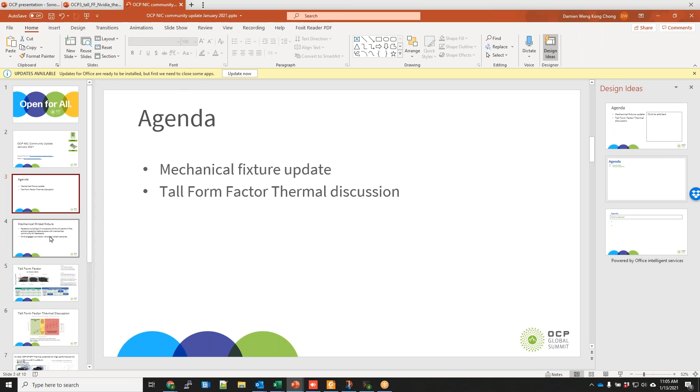First of all, the mechanical fit test fixture update on behalf of Chris. Facebook completed the design before Christmas, and we decided to build this small prototype in-house. We have a small CNC lab in-house, so we're going to build it there. After the CNC is done, Chris intends to perform the fit check himself first, before he shares it with the mechanical community for feedback. So far, Chris has also engaged the connector vendor to obtain the connectors to fit into the test fixture.

Is there a timeline by which the community needs the design files to be contributed? The reason I ask is because the intent is we prototype it and then send it to a few key folks in the mechanical community for feedback, to see whether it's good enough before we actually post the design file to the Wiki, to make sure that we have a higher quality contribution. Does that sound good to the folks here?

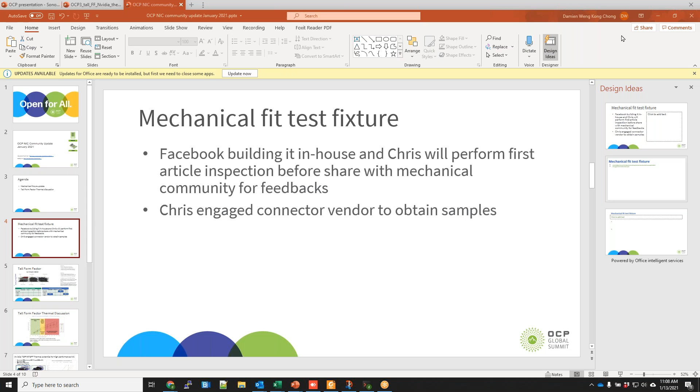So in terms of CTF, Jonathan, is it to validate all the CTFs listed in the spec? And also, are you checking just the main dimensions, or does it also check the tolerances? I don't think this will be able to check all the tolerances down to the significant digit that we're looking for, but it helps overall. Okay, thank you.

So Damien, is it possible? I know you're saying you're going to send it out to a few companies to try. Is it possible to sign up for this kind of fixture, or request one? Yeah, it is possible to sign up to get early samples.

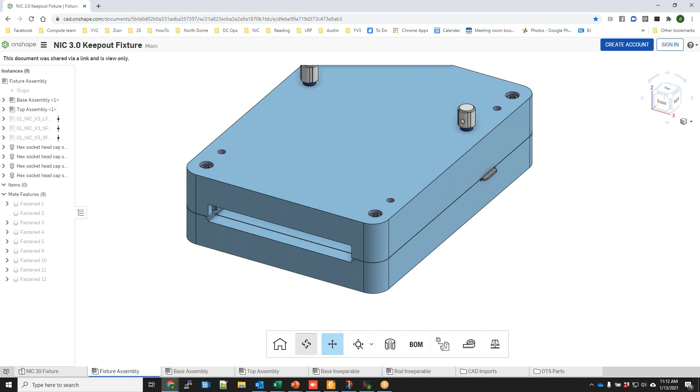So it is a fit fixture that basically we can plug the small form factor or large form factor cards into and see whether it fits. The top portion, as I understand, is see-through. Yeah, so we can see whether they have any interference. Yeah, this side is for the large form factor.

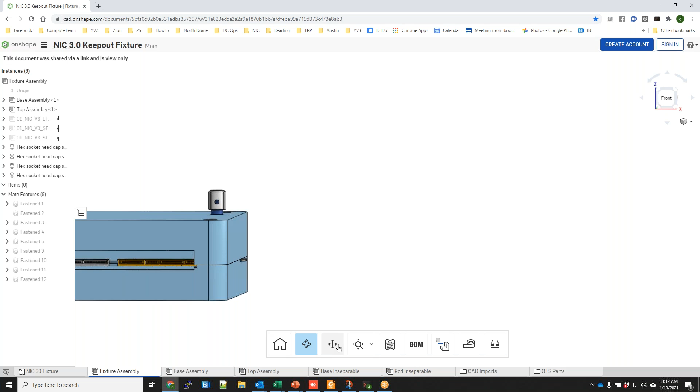So you need the connectors from the back? The connector at the back will be, as I know, fit in and glued. OCP, right? Yeah, so you need the NIC card to plug into the fixtures. So the unit under test is actually the NIC card.

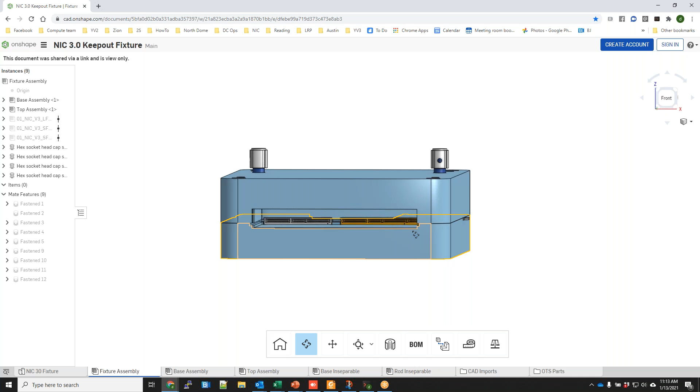Because the action item says Chris is looking for some connectors. If he's looking for the connectors of that NIC card connector, let him contact me. I'm Junhua Chen. Oh, Jinha. Yeah, sorry, I mean Chris already got it. Okay. Thanks, Jinha.

Yeah, this also works well. Let's say you do an NPI on a new NIC card, and when you assemble everything you don't have the high-end measurement, you have a caliper that you may not trust, you can take your new card and plug it into this fixture to make sure that everything fits and is within the limit before plugging into a system or sending it out to a customer. Okay, good point.

Hey, Jonathan, so is the goal of this in addition to the actual measurement at manufacturing, right? It's not to say that we're going to skip those measurements later. This is mainly for engineering purposes, right? It's not meant for production, where you say, "Hey, my card fits into this, so that means I pass all the tests," right? It's just for engineering purposes.

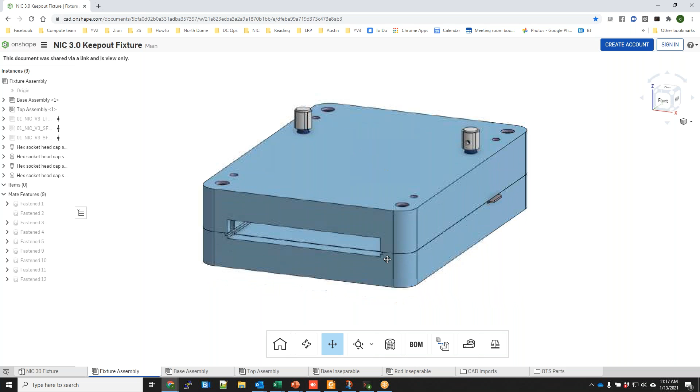I'm not sure. I think Chris made the top side see-through, maybe plexiglass. And then it's a slide-in. So if during the sliding process you're hitting something and it's hard to slide in, you know it, because the intent is not clamping, it's sliding. It mimics exactly the way you insert into a system.

Right, but that would be a gross violation. I'm just talking about something that is already on the borderline or barely touching. If the surface allows us to spray some paint or something on the top lid, then you can visualize it: if the dye shows up on the heatsink, then you know it's actually on the borderline. So it gives us a better idea of the margin that we have.

Yeah, I'm not sure. We may need to verify that, but I'm guessing with the way the fixture is, everything will be that opening. Once you insert it inside, if it fits through that opening, that means it's going to fit through that profile inside.

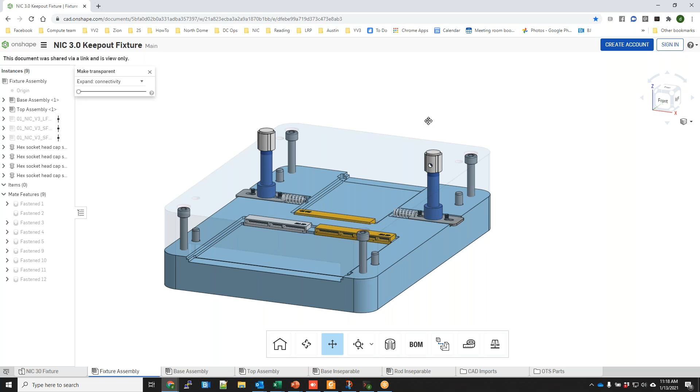Okay. I'm not sure whether your dye has some special characteristic, but I think it's possible to spray something on this, and then you can fit it in and see whether it gets scratched. The dye capability was not mentioned when we first discussed it, but I don't see a reason why we cannot spray something on the material. Okay, we'll figure it out. Thanks, Damien. The only thing we talked about is the top has to be transparent, so we can see any potential interference and how well it fits.

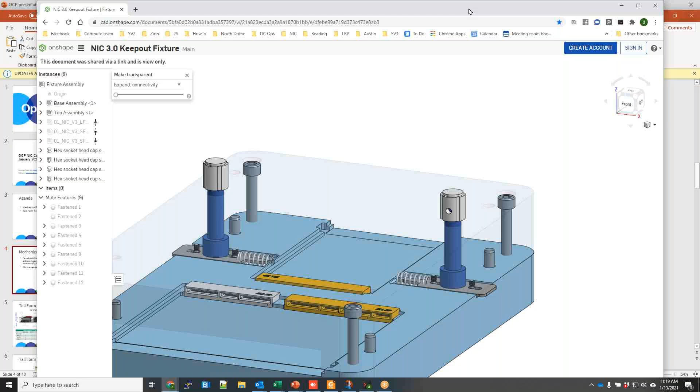Oh, by the way, since we are on this picture, this is the added feature in the newest design that has the spring loader to check the internal locking mechanism. It was feedback from the community, and Chris incorporated it. So just push in, right? Push it in, or pull out. Actually, I'm not sure how it works. It looks like it can be pushed in and out, and there's this thing to screw it.

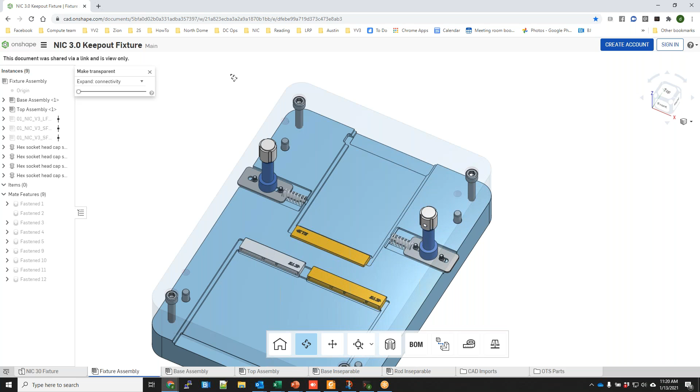Yeah, it looks like push in, because that's how the spring was attached. So I guess it's push in. I have not seen the real one. I think it's in the process of shipment. Okay.

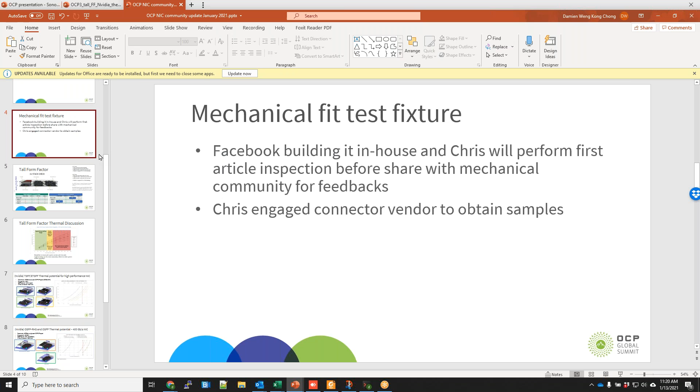Next, we'd like to continue our discussion on the tall form factor. What has not changed is how we stack the two tall form factors in the 1OU. However, it's also good to show the NIC in the open rack standard, 1OU, versus the standard 1RU. 1RU is approximately 44.5 millimeters, and 1OU is 48 millimeters.

With the slightly more height, we're actually able to put PCIe CEM together with the 17.8 millimeter connector that we call tall form factor. We also can stack if there's any need, but I don't think there's any need to have the 17.8 and 20.1 in the same chassis.

But what I really want to point out is if there is a need to have 17.8 stacking with CEM, maybe in an open standard like OpenRack v3, it would be a good one in the future. Just to bring up some mechanical awareness here.

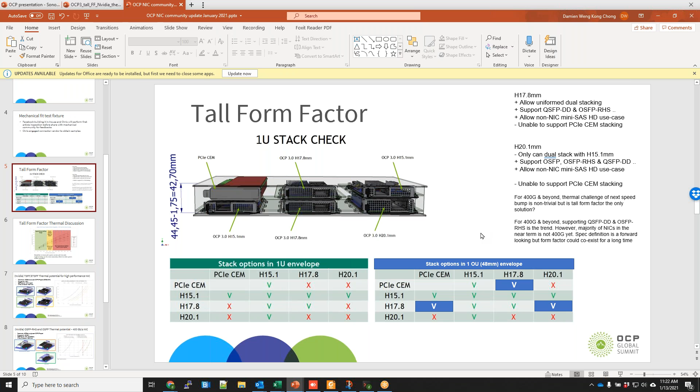The next one is the tall form factor thermal discussion around hot aisle. I sent out email to some system vendors asking for clarification on the hot aisle operating condition. I'm not that familiar with hot aisle, because in Facebook designs we actually have cold aisle.

The reason I asked is I have seen this chart, Thomas, we have it in our OCP NIC spec, that kind of says that beyond 300 LFM, even for hot aisle, is non-typical server airflow. I would like to double check this statement.

Yeah, and do we have a system vendor online that also has a system where your NIC is plugged into the hot aisle? Would like to double check whether we actually have the boundary condition correct here. Any feedback on the hot aisle airflow capability for your systems?

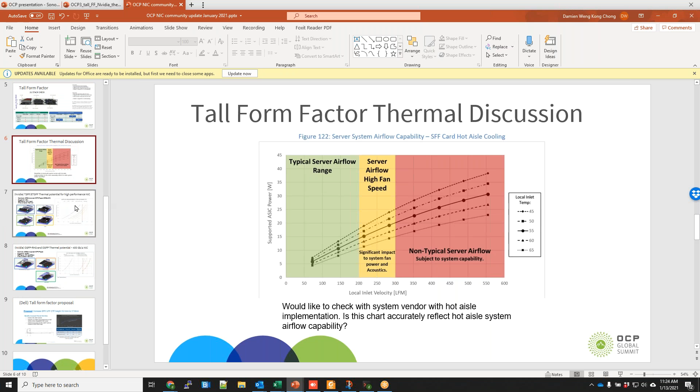Okay, now I pass it to Michal and Anna from NVIDIA to talk about their findings regarding the tall form factor and the extra tall form factor, and also Lenovo Warren requested to check 85-degree optics. That's something that the NVIDIA team has done as well. Michal and Anna, do you want to share, or we can use this screen? And Damien, we can continue with this screen. It's okay, I think. Okay, great.

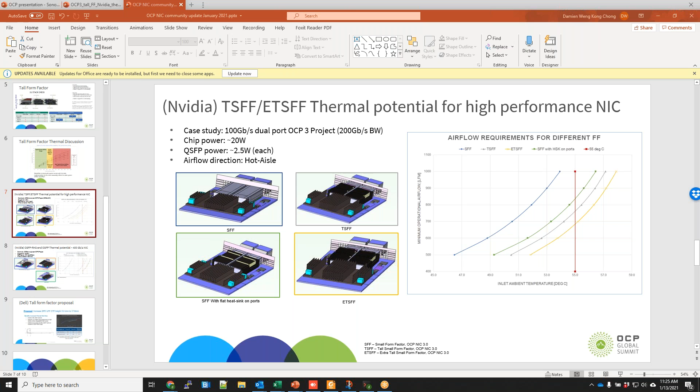Okay, do you hear me well? Yes. Okay. In general, this slide remains the same as it was a month ago, except the axis title with inlet ambient temperature that we changed. The main purpose of this slide is to show that for current or previous projects, there will be benefits for a higher form factor. For higher form factor we have better results, and you can see here that for extra tall form factor we have the best results, and for tall form factor better than our current form factor.

This case study is about an OCP3 project with 100 gigabit dual port. Chip power is about 20 watts, and QSFP power is 2.5 watts each. It's Mellanox NVIDIA cables, but in general it can be up to 3.5 watts. We also checked the hot aisle direction, and we can see that for the small form factor, it's really difficult to pass 55 degrees Celsius ambient temperature. If you can insert some fins on the QSFP, we can decrease our airflow requirements or increase the ambient temperature that we can pass.

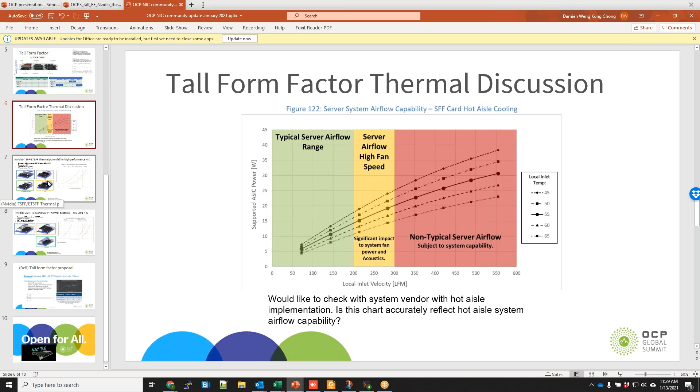Yeah, you mean this is 45 to 65, right? Yeah, this one. This is a chart, some kind of graph, but we also have a table with all tiers. For 55 degrees, the highest tier is tier 12, I think, and it's 1,000 LFM. So we don't have more than 1,000 LFM in the spec. Yeah, but that sounds like a lot. That's why I also double check with the system vendors. Yes.

Hey, I have a question. You said this data you're showing addresses the QSFP thermal. Yes. Now, is there a study for what it looks like for different chip powers? Right now you're fixing it at 20 watts. Do you have one that shows the airflow required for chip power going beyond 20 watts?

I didn't do it for this specific project because the most difficult part for us is cables in general. I just took a project that we did in NVIDIA and made some changes in the design of heatsinks. It is possible to check how it fares with a higher ASIC power, but again, the main problem here is cables, the optical modules.

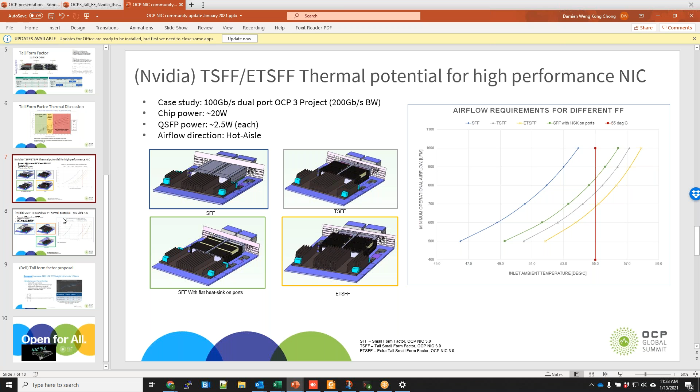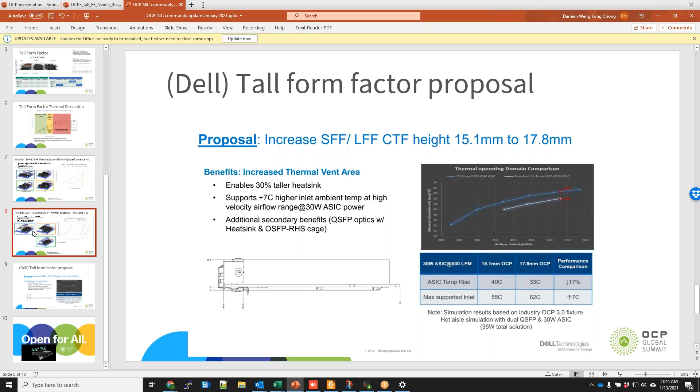Because in NVIDIA analysis, you see that OSFP RHS cannot, at least not having a heatsink here. I wonder if there is a mechanical challenge that we are unable to, or the mechanical challenge is too great. Even if we have it, it doesn't help much because maybe the heat spreader is too thin. It doesn't make sense. So that's the part that I would like to double check.

What's the height difference between? Go ahead, sorry. Yeah, just a little notice. You can have a heatsink on top of the OSFP RHS and TSFF. So we can have. Okay. So what's the height difference between what NVIDIA is proposing and what Dell is proposing? They align. We are proposing the same. Oh, okay. So basically now we have three, right? The tall form factor is aligned from NVIDIA and Dell, and then the extra tall proposal from NVIDIA.

But anyway, we shouldn't look at which company proposed what. We should look at the technical items. So at this point we have two options on the table. Actually, three options on the table. First option is do nothing, keep just the existing form factor. The second option is pick which one. Probably third option is do both. Hopefully we don't go there.

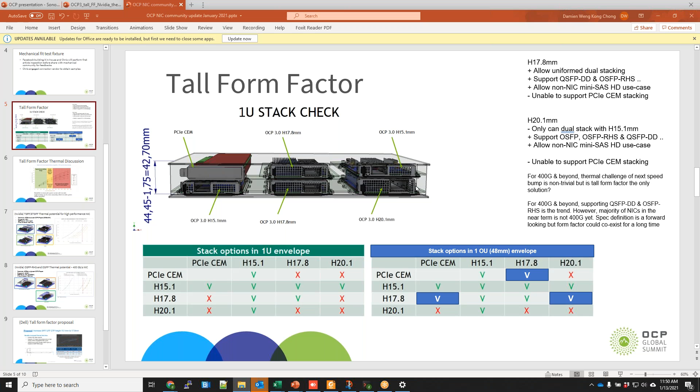This is John with HPE. I just had a quick question on the thermal simulations. Can you share what assumptions were made around the heatsink material, the TIM, and any other thermal interface details that would go into this simulation? Unless those were shared somewhere else and I missed it. And Michal, can you take that question? The heatsink is from aluminum. And are you talking about which TIM for the chip, the IC? Yeah, going into the ASIC on the chip.

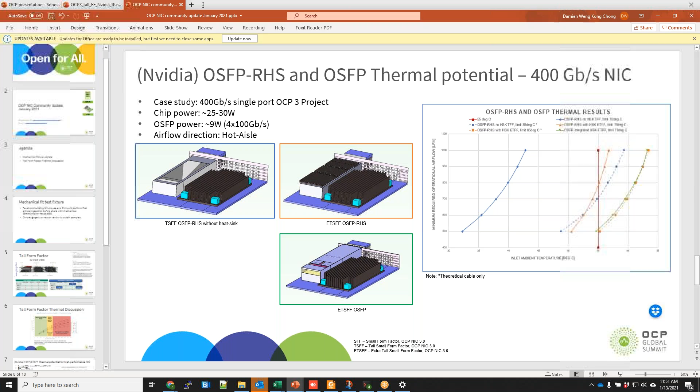I can check in the simulation and come back to you. But again, the main issue here is the module. This is the limiting factor. So I think it's a bit less relevant about the chip. But I can check what we added in the simulation and send it to you. Okay, thanks.

Damien, I hijack the screen. If you can see it now, just let me know.

Can you see my screen? Yes, I can.

All right. So this is the most updated models which were shown on the Tech Week. Here we have a tall small form factor, which is 18.1, and this is OSFP RHS with heatsink. All right, so the maximum heatsink height is 14.5 millimeters, and this clearance is supposed to accommodate the tolerances and the travel of the heatsink during the cable insertion.

I want to check one thing. I think earlier, NVIDIA initial proposal is 18.1, and then Dell proposal is 17.8, and both of you align to 17.8. After align to 17.8, can we still put the heat spreader? Oh, sorry, this is 17.8. I showed you the previous one. This is the proposal update. The 17.8, as you can see, this 0.3 millimeter was shaved from the heatsink height. So the heatsink is still existing, but it is 0.3 millimeter lower. Okay, got it.

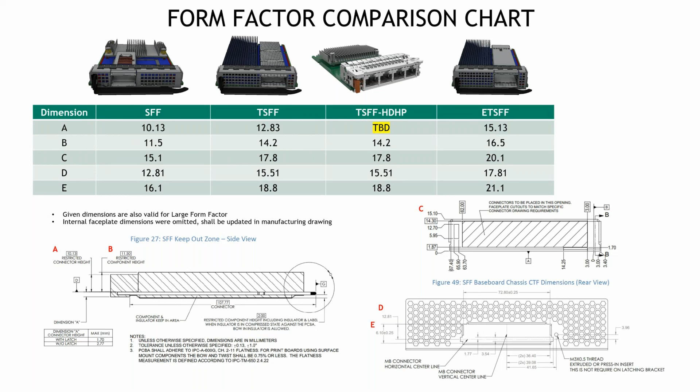Hi Andrew, can I ask, I didn't catch how tall the heatsink can be on the tall small form factor for the OSFP? You can see it here. Without a module in the cage, the top height of the heatsink could be 14.2. This dimension could be controlled by your manufacturing. If you tighten the tolerances on the heatsink itself, you can make it a little bit taller, but not significant. Okay, so above the PCB, it's about 14.2 millimeter available. Correct. Okay.

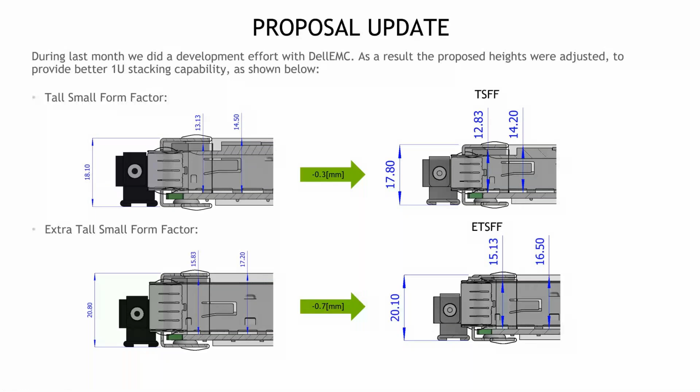Okay. Right. The intent is we get an updated result through email next week, and then we formulate the survey questions with the results shown, and then we send it out through the survey to the community and see whether we have good enough input for us to make a decision in the next month, the OCP NIC meeting, which one we'll focus or whether we do anything. Hopefully we won't do nothing, my hope is we'll do something. Just which one.

Then can we have a meeting not within a month, but within 2 weeks or so? Working session. Because we are quite interested to implement those additions and to vote to make a decision. Do you mean that you would like to see a working session being set up so we have a chance to talk about this again in 2 weeks? Yeah, it would be great to not wait another month to the monthly session. Yeah, I think the working session we definitely can set up. It's just whether the survey closes and the decision is made in 2 weeks, that part we might not have. I think a month is almost the right time to make that decision, but we should have a checkpoint in 2 weeks. Yeah, we can do that. All right. Thank you.